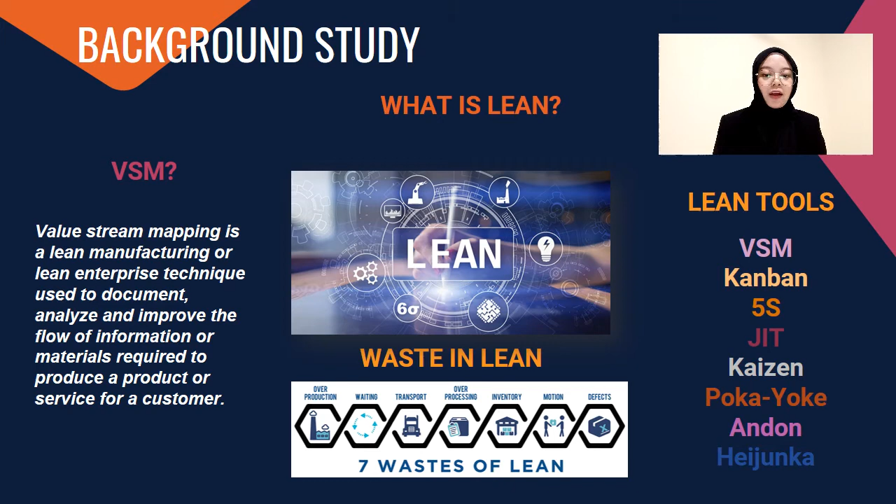The problem statement of this study is that economic growth has influenced the manufacturing sector to grow in producing quality products, especially in the Malaysian automotive industry. Due to high demand from customers, the automotive supplier still has some constraints in meeting customer demand due to low production efficiency at the assembly line.

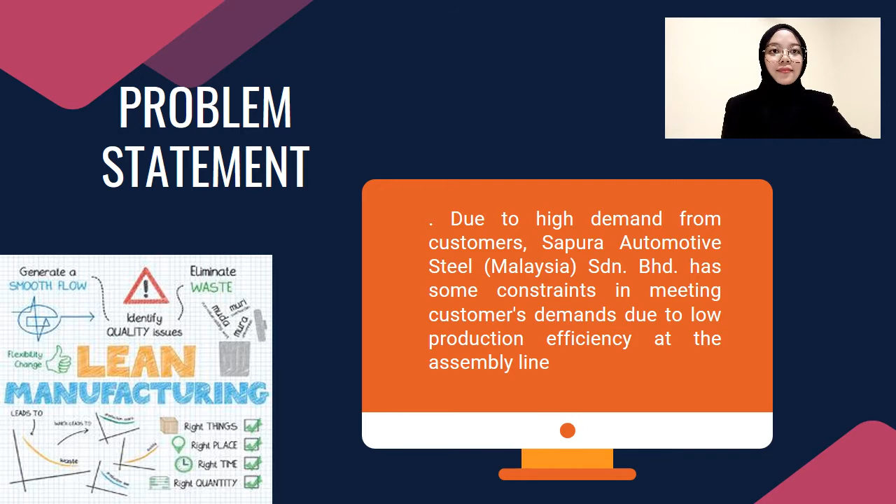This study consists of 3 objectives. The first objective is to determine the current lead time for stabilizer bar model SB63. The second objective is to identify the issue that causes a bottleneck in the manufacturing process, and my last objective is to propose a lean manufacturing technique and to provide suggestions to assist in improving and solving the problem.

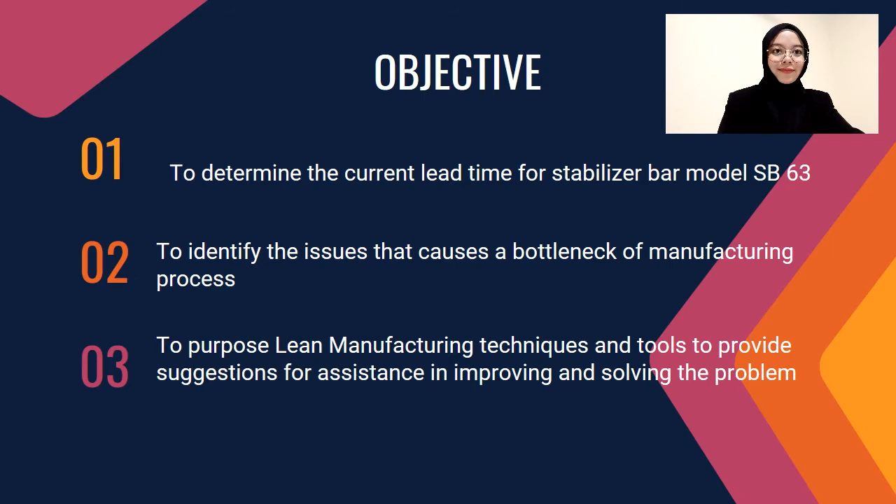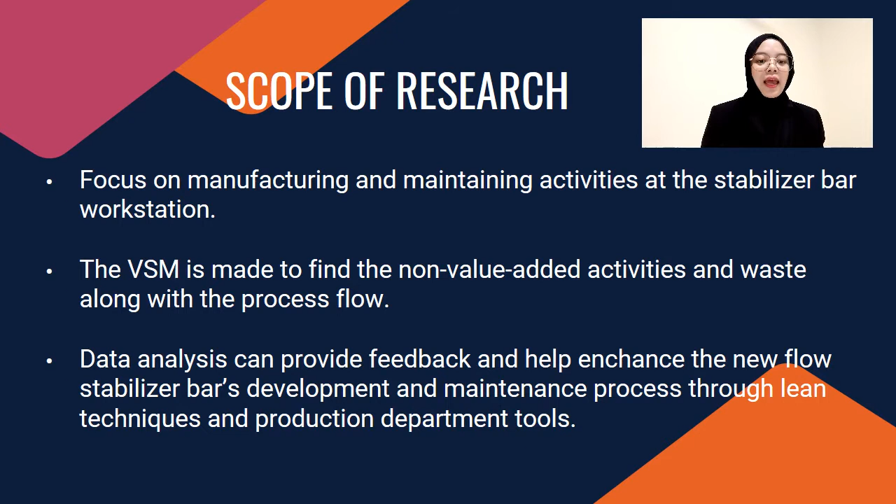The scope of the research: first, it is focused on manufacturing and maintenance activity at the stabilizer bar workstation. Second, the VSM is made to find the non-value-added activities and waste along the process flow. Third, data analysis can provide feedback and help enhance the new flow of the stabilizer bar development and maintenance process through lean techniques and production department tools.

Next, for the literature review, a researcher studied the use of value stream mapping in total lead time reduction by defining and eliminating non-value-added activities in an electrical company manufacturer. They concluded that with the aid of the Kanban system, the lead time in the current state map, which is 29.40 days, can be decreased, reducing the inventory level from 18.04 days to 1.5.

Moreover, a study by Bart and Shivakumar found that improving the use of value stream mapping and Kanban could increase worker productivity. The investigation showed VSM could help understand the current system, analyze the loopholes, and let one know precisely where the problem lies in improving productivity. The lead time for production could be reduced from 35 days to 7.75 or 7.8 days, a 77.89% reduction.

Lastly, a previous study by Taylor used VSM as a strategy to achieve efficiency improvement for the automotive industry, evaluated along with takt time measurement to reduce the cycle time involved in the process. To meet XYZ company's demand, they used the VSM method to analyze the production line's current and future state.

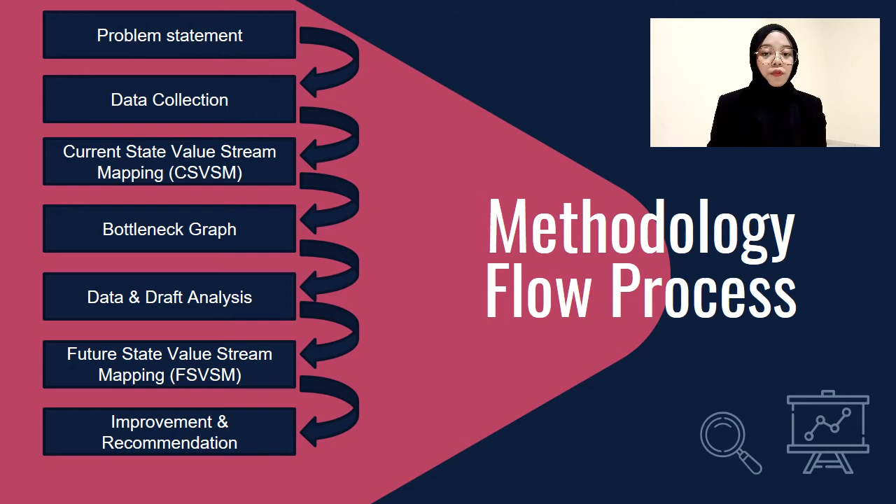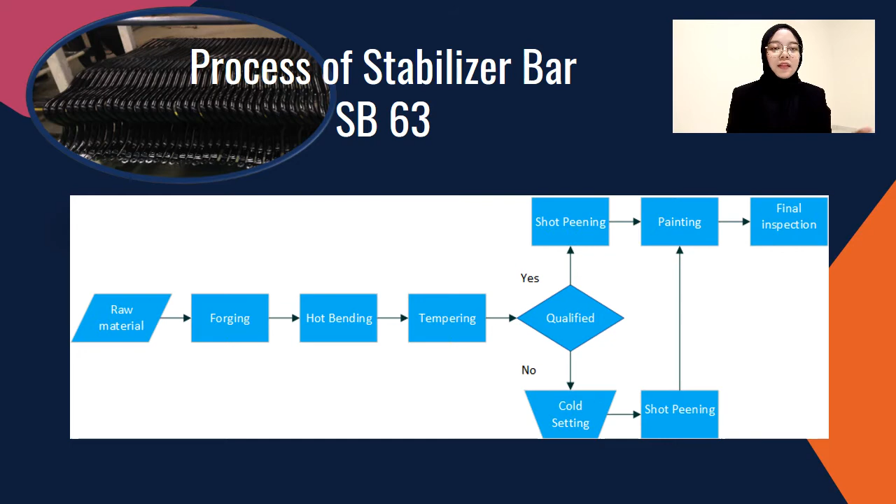This shows the timeline for the methodology. First is the problem statement. Second is the data collection. The data we gather in the project is useful and important to determine the current and future improvement. The data that needs to be gathered: first is the customer order requirement information, second is production control information.

Third is process information. Next is to construct the current value stream mapping. It will identify and prioritize areas of improvement. To create the current map, we need to identify the value stream that we want to analyze. Next is the bottleneck graph. The time calculation will decide which processes are the bottleneck. The data must be calculated through the takt time. Then by gathering the cycle time, it will show which process exceeds the takt time.

Next is data and graph analysis. To generate the data, Microsoft Excel and Visio are used. Microsoft Excel is used to plot graphs, while Microsoft Visio is used to construct the value stream mapping more easily. Last but not least, the future state VSM is generated once the issues with the current state map are found.

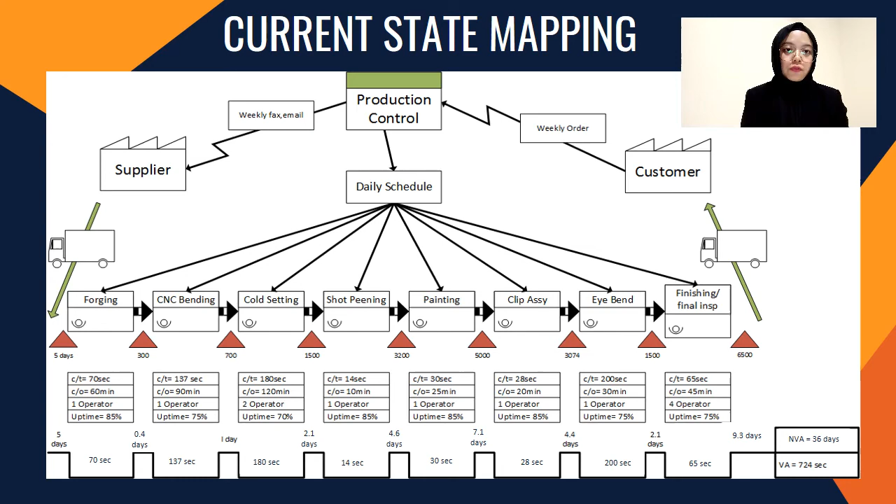Ishikawa and the Pareto chart problem-solving approach is very effective in searching for the critical variables of the problem. To analyze the possible factors, the Ishikawa diagram is used to relate the problem, and the problem is identified into 4 factors, also known as the 4M, which is man, method, machine, and material. The Pareto chart is used to decide which of the factors go through improvement, and to determine the possible causes to be focused on. For the 5 whys, analysis is the tool that can determine the root causes.

By improving the improper WIP storage, the problems identified are a long time to identify parts due to no access space between the storage lines, difficulty identifying parts based on the process, part name, date of manufacture and part location, and difficulty controlling the FIFO. So the approach is to make a space between the part storage and visualize part location based on the process. The improvement is that it is easy to find a part according to the mapping location, and second, FIFO control can be implemented based on color and shape.

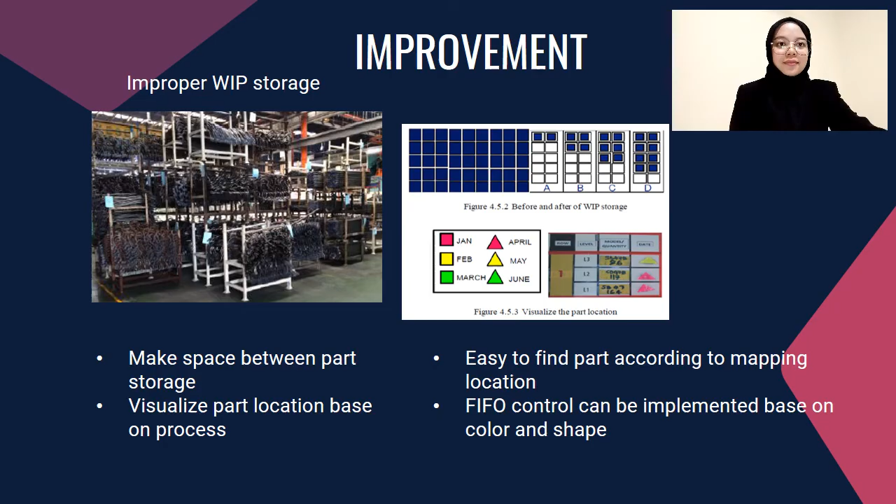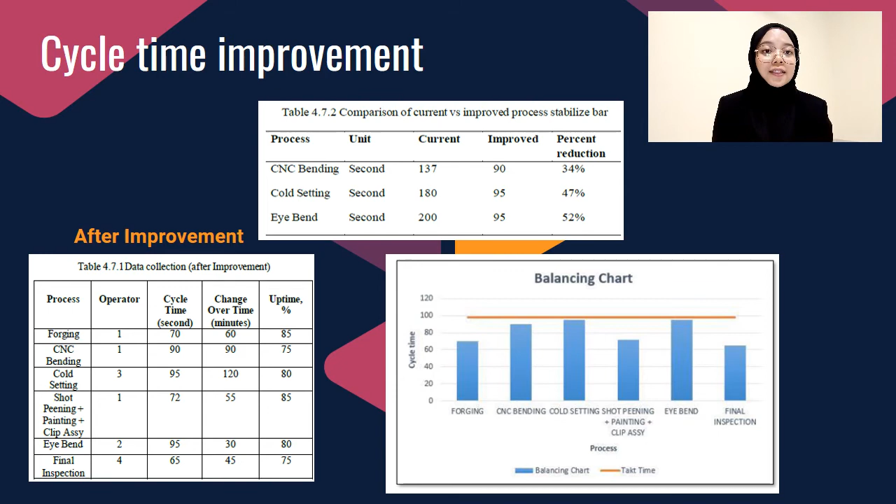For the future state, due to the improvement of the CNC bending, cold setting and eye bend workstations, now the cycle time is less than the takt time. These workstations previously had a high cycle time in the current state, and now they have a low cycle time. In producing the future state map, the Kanban system has been adopted. Some important items need to be concentrated on first. Each station needs to be considered, providing inventory for each production Kanban and also inventory for safety stock. In addition, communication focuses only on the supplier of material and the finished goods. So the production only focuses on two processes.

The most well-known solution for creating a pull system is to regulate the output by using Kanban in a supermarket. The supermarket has to be connected to two links. The first link is the flow of material, and the second link is the flow of information. The information flow is the process flow to accept the Kanban signal to create the replenishment for the production stock, and the flow of raw material is on the material.

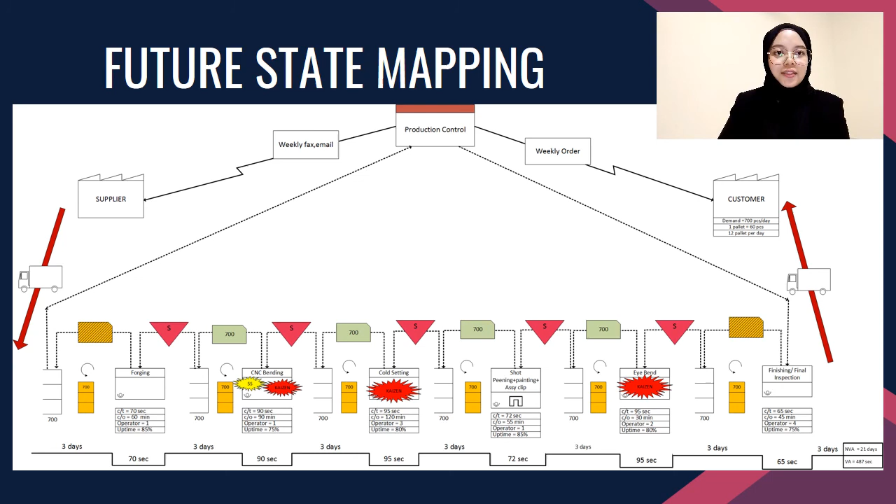In conclusion, the suggested future VSM minimizes the lead time by developing a Kanban system. The ultimate aim is to use lean production techniques and tools to provide recommendations for developing and solving the problem. Enhancements are made to improve the company profitability and reduce waste.

In recommendation, the Kanban system is a very strong instrument that can prevent overproduction, track work progress and avoid delaying the process. Control of overproduction can be done, and inventory reduction as well. Besides, visual control of progress delays or on-time work can be made. Also, problem clusters can be seen easily.